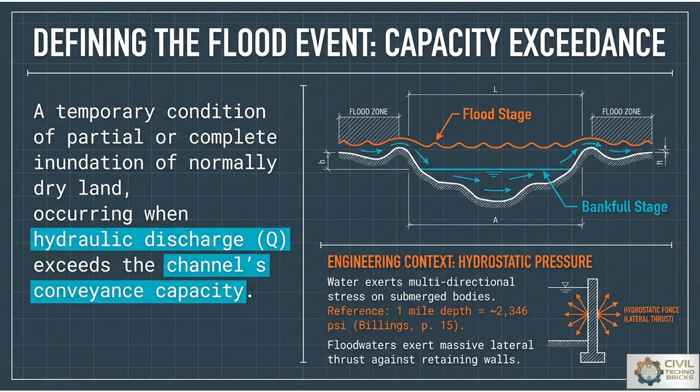With reference to that, 1 mile depth is equal to 2346 psi. So floodwaters exert massive lateral thrust against retaining walls, and we have to provide retaining walls with sustainable forces.

Here is the classification of floods by mechanism and onset: riverine floods, flash floods, and coastal floods.

Riverine floods: the graphical representation shows duration versus discharge - as time increases, discharge increases. This type has an extensive duration and slow onset. At the initial phase there is a slow onset, but at the end there is extensive duration, driven by prolonged precipitation across large catchments.

Flash floods: the graph shows initially rapid onset, below 6 hours, with high velocity. Rapid onset and high velocity are driven by high intensity rain in steep and urban catchments.

The third type, coastal floods, occurs due to storm surge, tides, and tsunamis with reference to the coastal region.

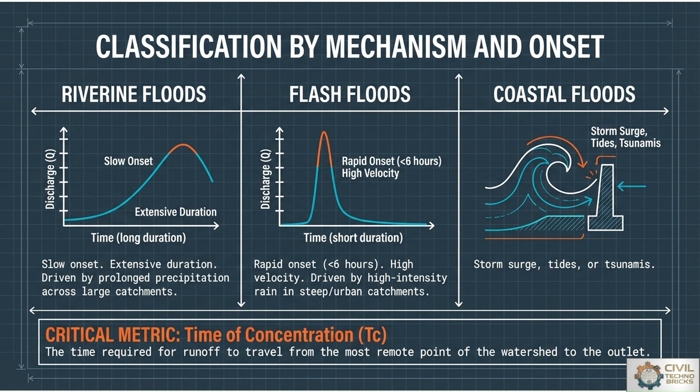The critical metric for flood classification is the time of concentration (TC) - the time required for runoff to travel from the most remote point of the watershed to the outlet. These three basic types are self-explained through the relationship between time and discharge. Flash flood severity specifically depends on this time of concentration, the duration required for runoff to travel from the furthest point of the watershed to its outlet.

Owing to flood etiology, where input versus physical constraint is explained, the manifestation of a flood geohazard depends on meteorological, physical, geological, and discharge factors. Meteorological characteristics are the input, physical and geological characteristics are the system constraint, and flood discharge is the output.

With reference to meteorological characteristics, heavy rainfall, snowmelt, and cyclones are the input for studying the etiology. In the process, physical and geological system constraints - such as topography characteristics, slope gradient, dam failure, and channel obstruction - are all dependent on the meteorological characteristics, which give the output as flow deviation, or flood discharge.

In the image, with reference to the geological context, channels or natural streams travel and collect water from the nearby watershed. If heavy rainfall occurs in a short interval of time, then a huge flood will occur, and that whole volume of water accumulates within the natural streams.

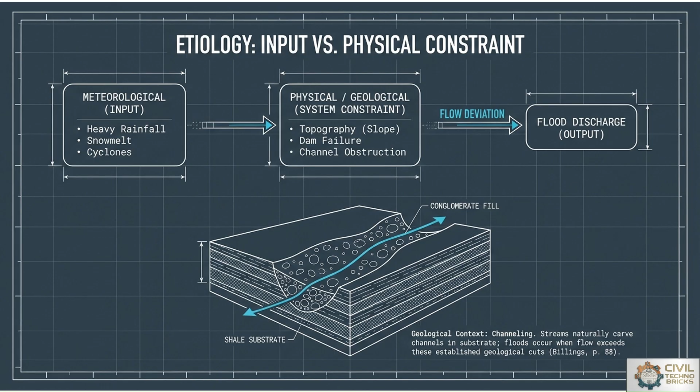But if rainfall is continuous and rapid, then that channel can't consume the whole runoff, and that time we get a flood situation. Now urban flooding, where the anthropogenic factor is involved. So why do we have to study urban flooding?

Urban flooding is calculated by using the rational method, where discharge Q is equal to C, I, A. What do you mean by C? C is the runoff coefficient. What do you mean by Q? Q is the peak discharge. What do you mean by A? A is the area.

So now if we are calculating the discharge with reference to the rational method, we have to study the natural basin and urban basin. Natural basin is a part of tree, a part of slopes, a part of channel, a part of river, where C is equal to 0.2, high infiltration, because the land parcel is open to the earth, open to the sky, where water has penetration activity, percolation activity, or seepage.

At the second part, urban basin, a large amount of area is constructed or covered with reference to concrete, or road surface. So very few areas are available for the penetration of water, so the runoff coefficient C is 0.9, where the surface is impervious.

So the graphical representation shows time on the x-axis, discharge on the y-axis. Impervious surfaces drastically shorten lag time and increase peak discharge, so there is high peak discharge and low peak discharge. Low peak discharge in the natural basin and high peak discharge in the urban basin.

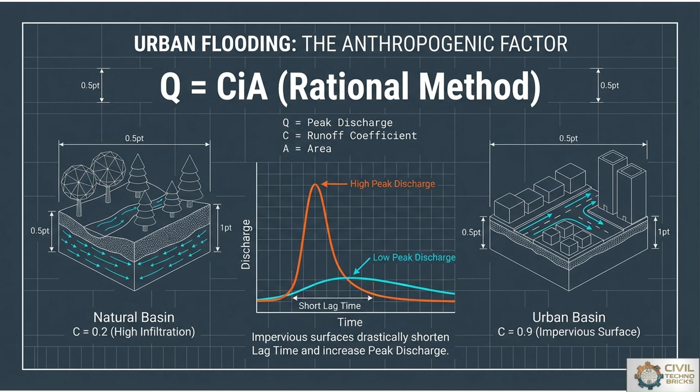Now infrastructure vulnerabilities, or we can say the forces and material degradation - mechanical forces and material weakening. Flood geohazard damages civil infrastructure through two primary pathways: destructive mechanical forces and severe material weakening. So flood geohazard damages occur basically through two types.

Hydrodynamic pressure or scour hole, or second part buoyancy uplift, that is the uplift acting forces. Flowing waters apply intense hydrodynamic pressure on the bridge piers, scouring out the foundation soil and forming highly hazardous scour holes. Elevated groundwater tables generate strong buoyancy uplift forces capable of physically lifting and displacing buried storage tanks. That is the buoyancy uplift.

Simultaneously, subgrade saturation causes a wet strength reduction, severely lowering the load bearing capacity of roads and precipitating sudden structural collapse. So with reference to the road point of view or embankment point of view, material must be stable and compacted. Otherwise it will get weakened, so the actual infrastructure may collapse or degrade. So material quality must satisfy the requirement for the construction activity.

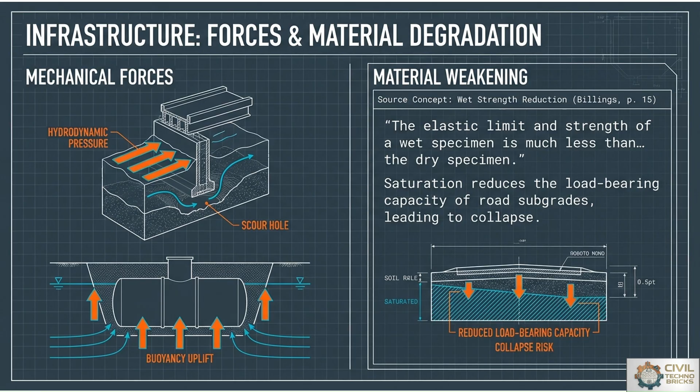Now, from a topographical or sediment point of view: erosion and sedimentation dynamics. Most important point: velocity determines carrying capacity and deceleration causes deposition. So the geohazard of flooding is tightly coupled with erosion and sedimentation dynamics, where flow velocity determines the total carrying capacity of water.

High velocity flood flows transport massive sediment from one location to another in the form of fine silt, clay, or heavy gravel particles through the drainage networks, or we can say rivers or streams.

When flow velocity drops, it induces a distinct sedimentation sequence, depositing particles in graded bedding planes which forms a sedimentation layer. This deposition clogs urban pipes and drainage conduits, reducing their cross-sectional capacity for water flow, compounding the risk of subsequent flood damage or events.

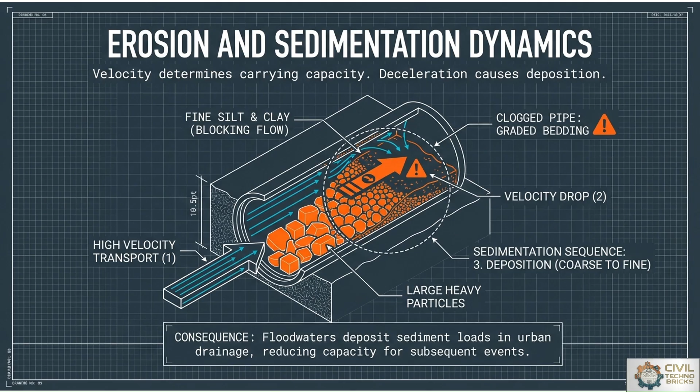So return period is the most important point to monitor the floodplain concept or the zoning of the risk, where a 100-year flood is not equal to one every 100 years. So the flood occurring before 100 years is not constant; it will not come in 100 years only. So return period is an event with 1% probability of occurring in any given year, so in any upcoming years.

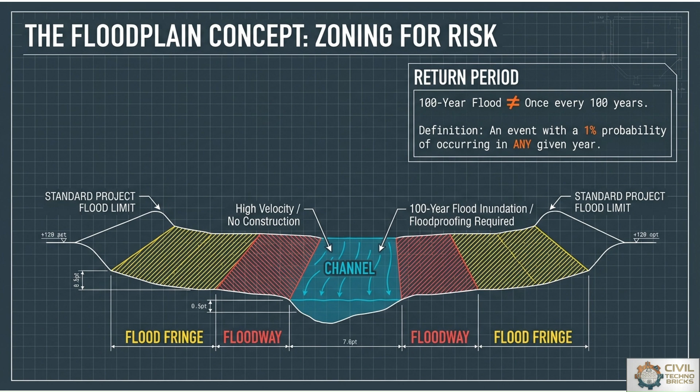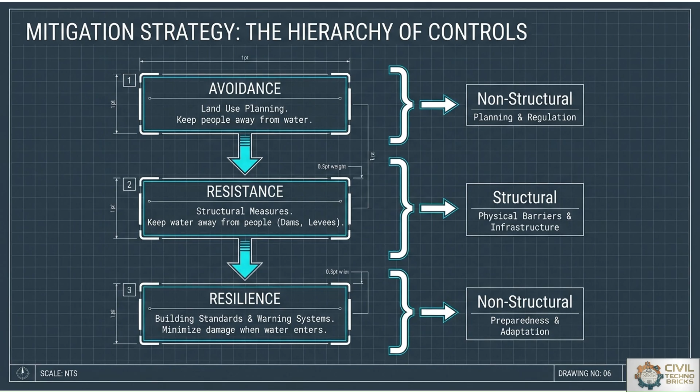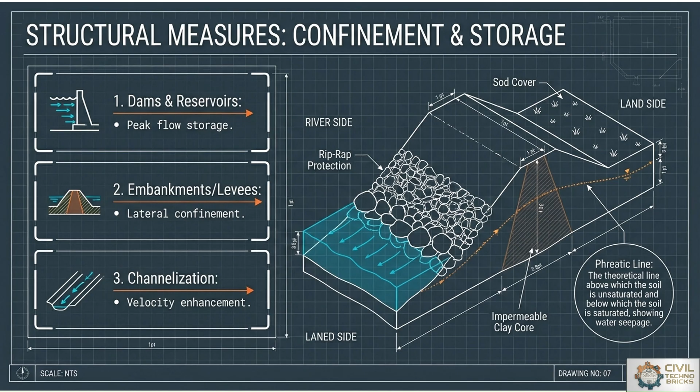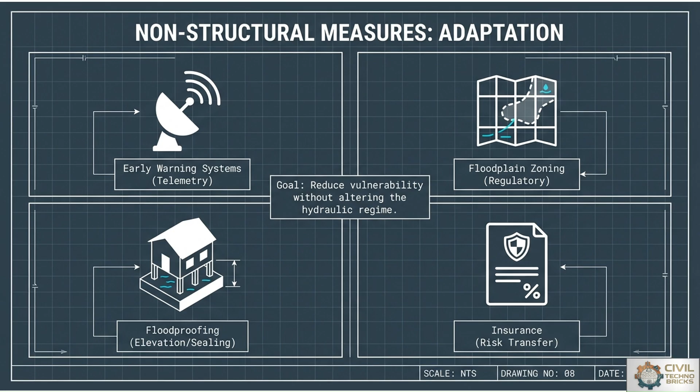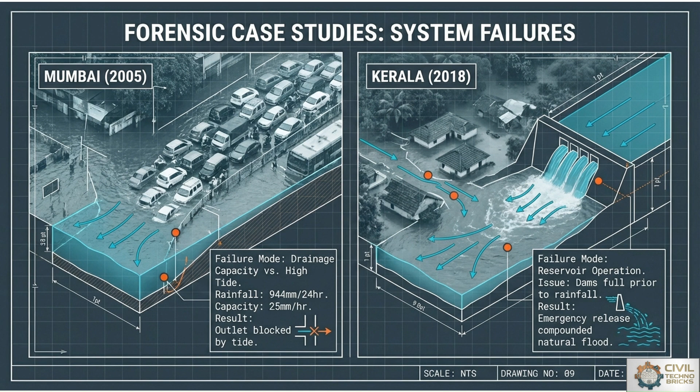In Kerala 2018, the failure mode was reservoir operation. The issue is the dam was full prior to rainfall. Result: emergency release compounded the natural flood. So basically, the emergency floodgate releases compounded natural reservoir flows downstream, causing systematic infrastructure destruction. So in 2005, the Mumbai flood occurred with an extreme 944 mm of rainfall in just 24 hours. So forensic analysis of historical disasters reveals how combined natural triggers and engineering failures produce catastrophic geohazards.